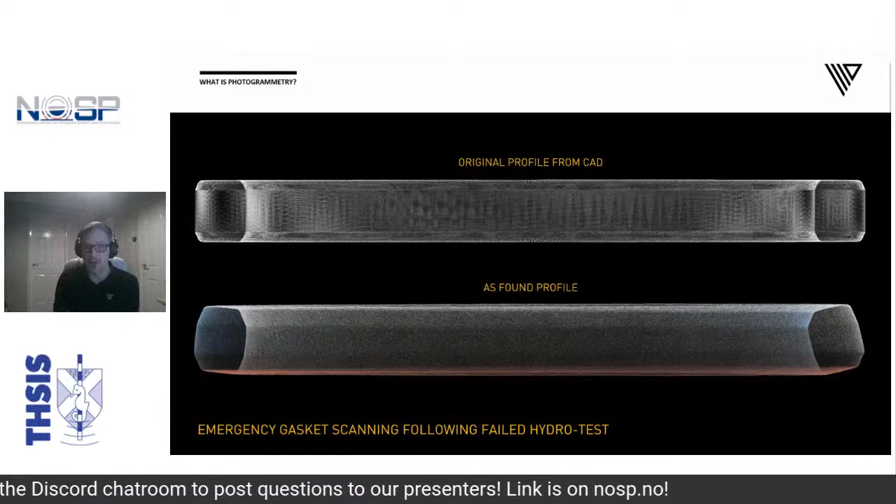Photogrammetry does not care about the size of something in the slightest. This would be one of our smaller scan targets, and subsea structures would tend to be among the larger pieces of hardware we've scanned, for technical reasons. So that is photogrammetry - it's very flexible. It works under a microscope, and it also works through a telescope. If we can bounce light off of an object, we can record it in 3D.

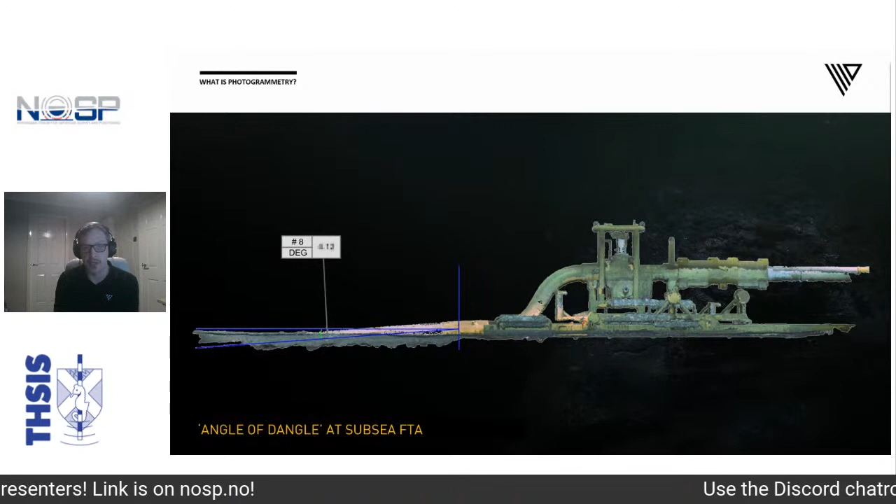On to some of our case studies now. I've tried to mix them up a bit in case any of the audience listened to our recent presentations, in an effort to keep things a little bit fresh. We're going to start off with 3 projects in some depth.

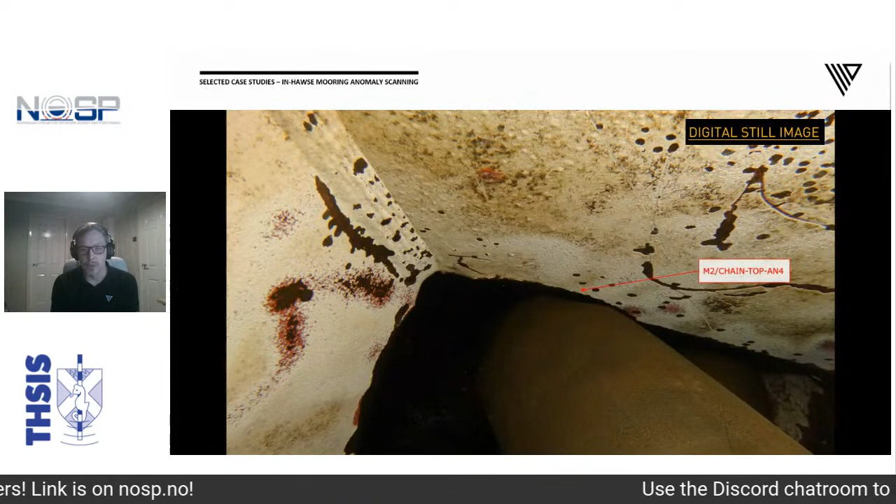In 2018, we were invited by a UK operator to discuss a challenge at the interface between hawse pipes and mooring lines. This digital photograph simply shows the challenges posed by the location of the anomalies - very hard up against the shoulder there. We were then told that 3 companies had tried and failed to collect measurement data, and that this effort was their last attempt before taking more drastic action. So, challenge accepted, our confidence prevailed, and we were awarded the project.

Again, another digital still image, purely as an example of the quality of data we need for tight tolerance tasks such as these. This is a downscaled version of a 20 megapixel photograph taken at a mooring link. As you can imagine, the original can be zoomed into for days, and this is the photographic quality that we really need under tight tolerances.

For the operational phase, we designed a system to enable capture of the mooring links and provide a full inspection report on the depths of the fretting, as well as the remaining bar stock. This was proved on shore in front of the client prior to mobilization. What you're seeing on the screen is a very small deviation analysis on one of the frets on that mooring line.

We devised a new reverse engineering workflow to alleviate the fact that some anomalies were obscured by the hawse shoulder, as you saw in the photographs. Some depths were as shallow as 1 millimeter, so cloud density and accuracy was absolutely critical during the project. More typically, anomalies were around 3 or 4 millimeters deep, having a significant effect on the expected life of the mooring lines.

We were glad to collaborate with the operator and the certifying authority during the reporting phase to make sure the way the data was reported on was fully understood by all parties. That was a very good exercise for us, helping us understand what the likes of Lloyd's and DNV are actually looking for.

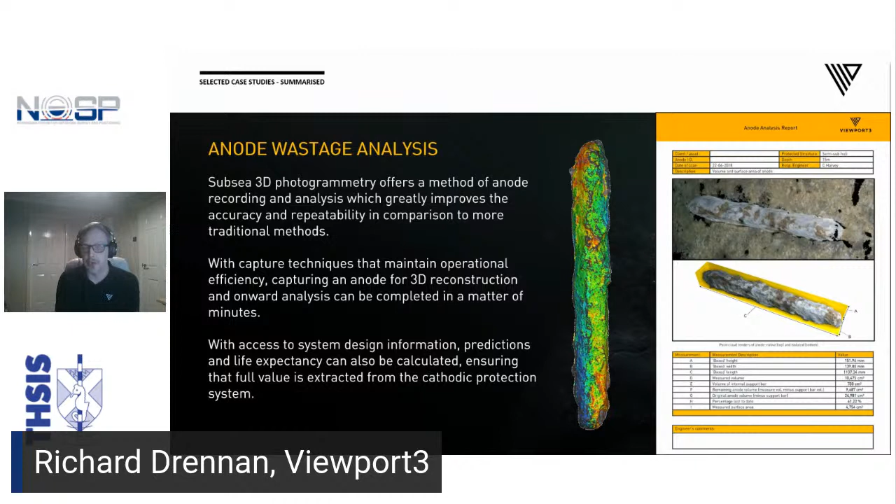With the rise in wind farm IRM requirements over the last few years, we've also simplified the process of scanning sacrificial anodes during annual inspections. These are now captured in a matter of minutes, with a comprehensive data sheet issued for each anode. This is of huge benefit when comparing the CP system design info to its actual performance, and for following years where required if some anodes are performing particularly badly.

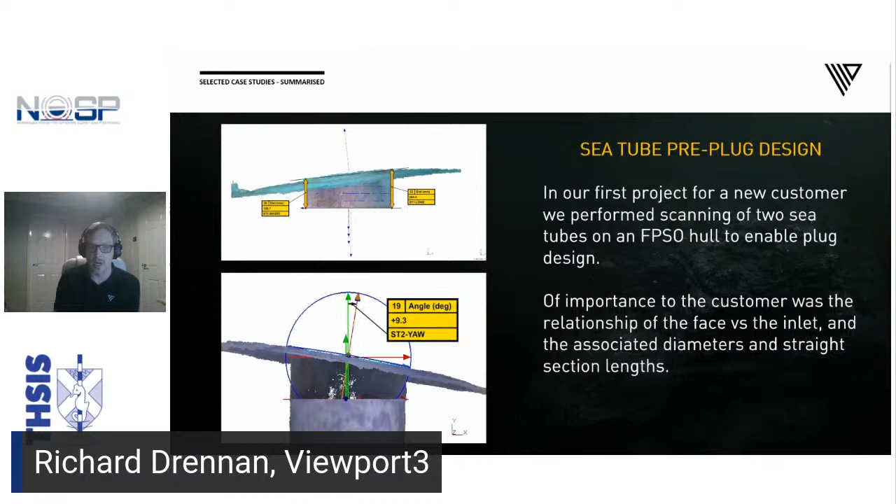Another mildly urgent job for a new customer of ours in the Norwegian sector last year. For this task we reported on the details of the sea tube distances, diameters, and angular relationship. This demonstrated that replacing missing CAD information is more efficient than trial and error methods. The pitch, roll, and yaw we were able to detail went a long way in helping them with that plug design, and they returned to us just a few weeks later.

This is the last of the case studies. Contrary to this image, that line should not be buried. We performed this 3D scanning task for an asset in offshore Angola, and we were able to detail the characteristics of the failure as well as the crack that had resulted at the FTA end. Quite a challenging task, but the ROV team were fully switched on and quite easily coached into collecting some very usable data.

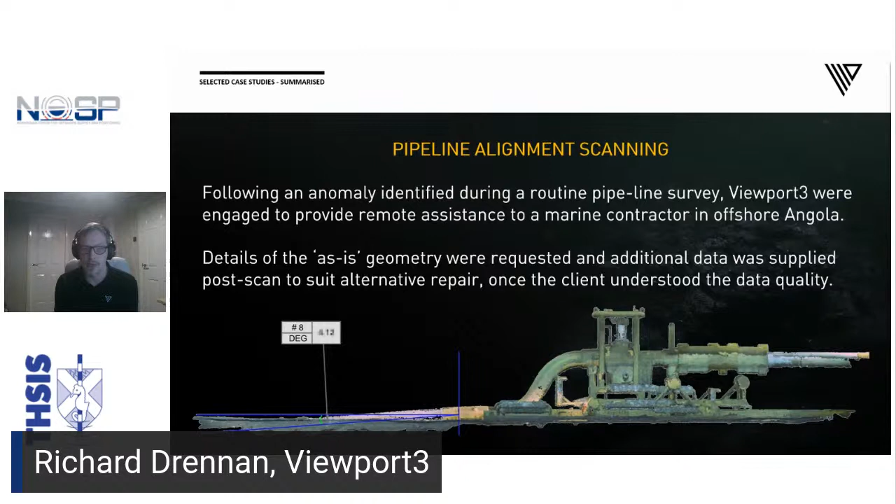Now that we have our 3D data sets in hand, we'd call that the halfway point. It's now time to use them and extract genuine value from what we've collected.

This is where CAI analysis and interrogation techniques come in, CAI standing for computer-aided inspection. It is critical that the software deployed is modern and suits the type of data you're trying to look at. It's also critical that the software does not introduce errors of its own making, which is something we've seen with some of the older packages.

I'd like to present, well, the title of the topic is a brief case of briefcase studies. We get into quite a lot of different fields out with the oil and gas industry. So what I'd like to do is present as broad a range of instances where we have applied photogrammetry, particularly using our own GP3D, which is our general purpose 3D subsea scanner. A lot of the work we've been doing recently has been concentrated on FPSO decommissioning, so I've really just modified one of our existing presentations.

So I'm going to start off with a quick overview of Savante Subsea, just to let people understand where we've come from and where we're going.

I started up Savante in 2003. I was 24, did it with £50 and set up a company. So I can certainly relate to the first presentation and a lot of the more business-related side of that presentation. We are now very much a specialist survey contractor, but also a developer of solutions. Our biggest market is still in the oil and gas sector, where we have developed, in addition to photogrammetry, subsea 3D laser scanning equipment, and additional optical technologies, which are themselves a variation on a theme of photogrammetry, using stereo cameras, SLAM mapping, which is simultaneous localization and mapping. And then more recently, over the last couple of years, we've been moving beyond 3D imaging and laser scanning to look at how we can evolve and make use of new technologies such as artificial intelligence, and also augmented environments for working in poor visibility areas.

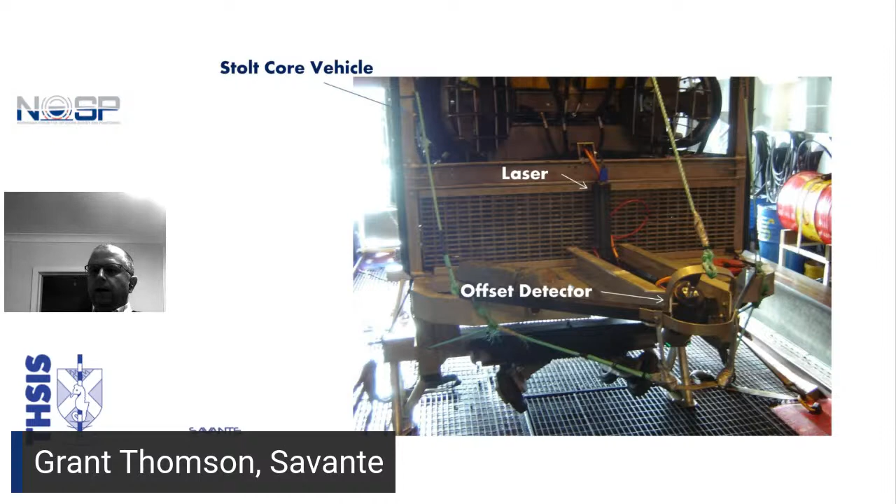I'll just move on to this one. This is actually, just in passing, one of the first subsea laser scanners that we actually worked with in Norway. So I'll move on from there and get back into photogrammetry.

The highlights of photogrammetry is that effectively we're creating a photorealistic digital twin engineering model. And the power of photogrammetry is that you create models which are exceptionally repeatable with high precision and accuracy. The value of that is it means you can go back to the same asset year after year and look to see the progression of degradation, whether it be through mechanical wear, sulfate reducing bacteria, that sort of thing.

Really it's just another tool in the box for us alongside the other optical techniques and also our laser tools. So I'll deal with photogrammetry as a single strand here, but what we have found with it is it is a very effective means of creating a 3D model underwater.

We still feel that subsea laser scanning, and we can show 3D data of the same objects collected by both techniques, the laser scanning still is the ultimate in being able to look at certain forms of damage. But the real value of photogrammetry is in the versatility and the flexibility of the equipment that you need to carry it out effectively.

3D-GP is our own software and hardware-based solution. I won't go too much into the details of it, but we have really centered on two main units. We've got the workhorse, which is this desktop-based system in largely orange, and that is really a very fast tool to run through all the calculations needed on a frame-by-frame basis from video footage in order to go and create a 3D model.

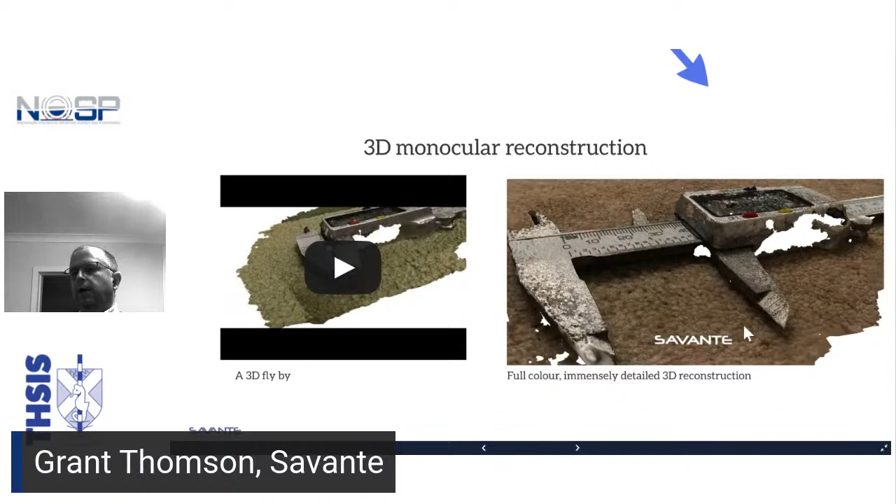Just a brief summary of what is photogrammetry. There is the old adage that a picture is worth 1,000 words, and with these pictures we pass them through our computer and detect features within each image. What we do from image to image is match the features between them and plot the relationship from frame to frame and within frame change. Then we have an algorithm which allows us to create a 3-dimensional reconstruction.

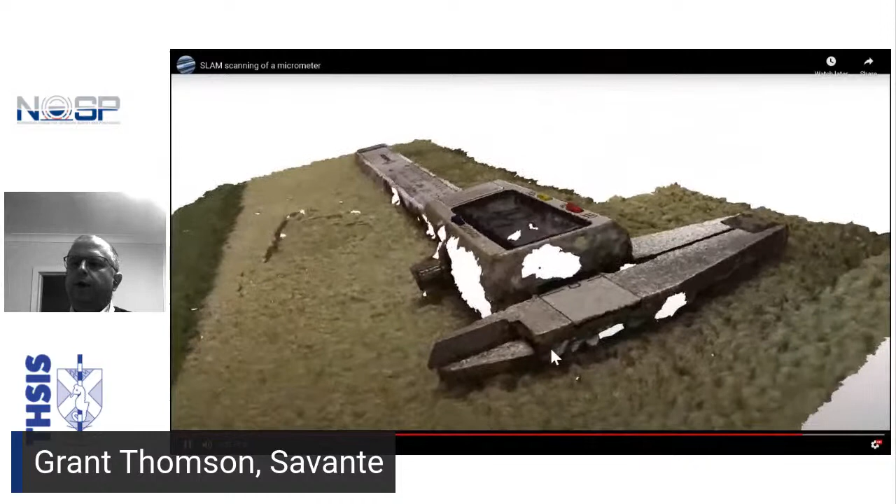I always present this as a micrometer because it's not a perfect world - there are some drawbacks to the technology. I like seeing the data in an unedited manner. In this example, you can pick up the tip of a caliper here, but there are areas showing in white, and these are experimental concerns you need to be aware of whenever undertaking a photogrammetry operation. In these particular areas, you've got signal dropout, and it's entirely due to insufficient light reaching the camera during those moments.

The benefit of monocular photogrammetry is that just about every ROV, towfish, or drop frame tends to have at least one video camera on it. So there is also a huge amount of heritage video data already within the industry, and we have many examples, even within this presentation, of heritage footage, whether standard definition or high definition.

An additional benefit of monocular work is that the performance and capabilities of photogrammetry improve as the cameras used to collect the data improve. So as we move towards faster, better camera architectures and larger arrays, we see an improvement in the quality of the 3D models we can generate.

Another benefit is that in addition to the 3D model itself, we can actually reconstruct the passage of the camera - a combination of both its position and its attitude at any moment in time during the collection process.

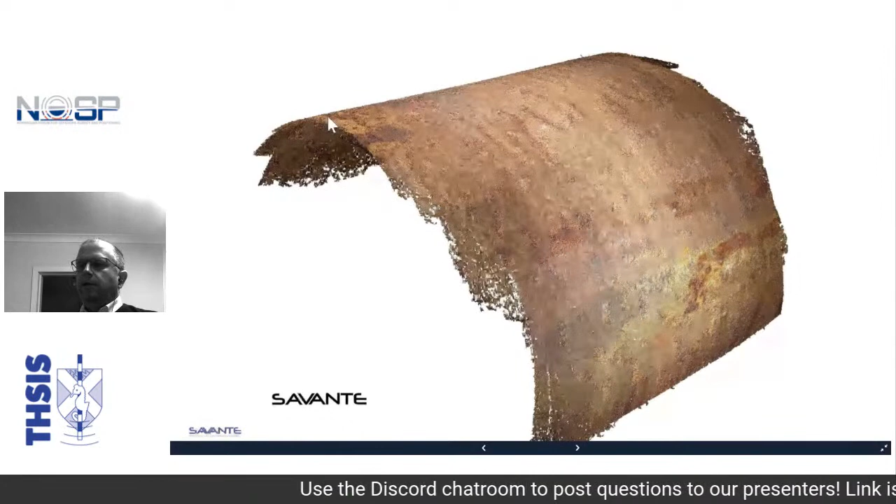So I've divided this up into sections, and I'll give a quick overview of some of the work we've done - an opportunity to show some of the data sets we've put together. Our first ever project was in the latter half of 2003, when we were asked to look at a pipeline anchor strike in the Gulf of Mexico. I haven't got that, but this is a partial scan over the top of a water injection line from the Gulf of Mexico at the time. It shows that the geometry here is very good, and also that we can pick up areas of corrosion and deformation.

That way, we have been doing a lot of work trying to extend the capability of GVI surveys, certainly not to minimize the requirement for them.

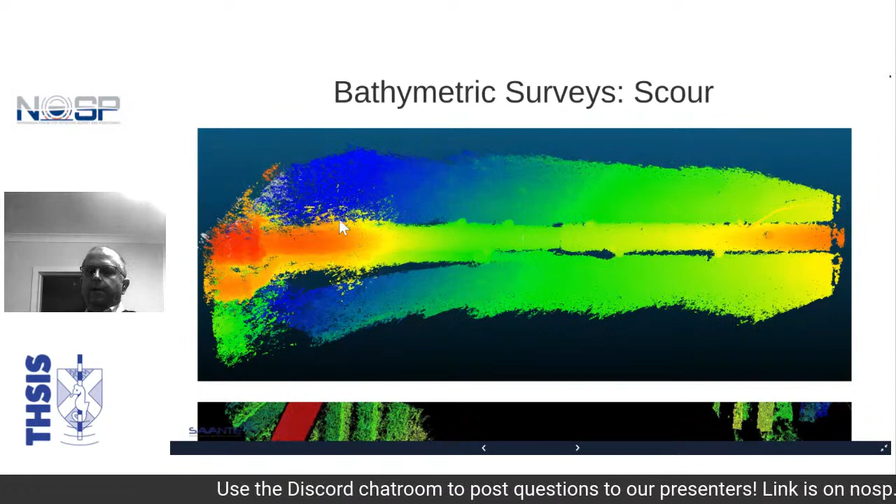This is an example of how we apply photographic footage from looking at spool pieces connected to wellheads. We've created a 3D model of a spool piece coming out from a concrete mattress, plotting the topography of the adjacent seabed, with areas in blue indicating greater depth. You can see elements of marine growth on top of the spool piece, and the point of connection.

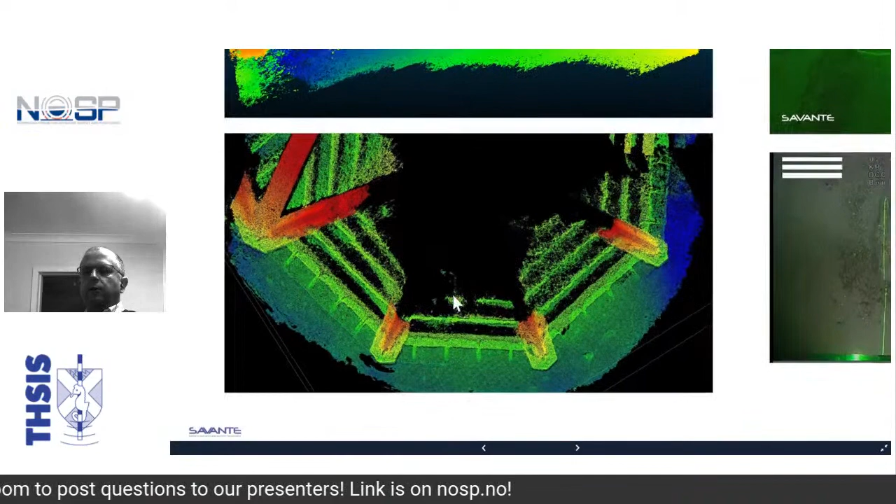Whether looking at pipeline areas or scour development around mud mats, this is another example created using legacy standard definition video footage. Again, it's able to resolve the presence of little stones in the seabed around the mud mat, and you can see areas of scour developing on the side. It's really adding value to what you can achieve using the most basic of video cameras.

This is a 360-degree walk around of that spool piece I showed you earlier, not colored to show depth. Again, this illustrates you can really see exactly what was down on the seabed. This is a 3D CAD model, so you can process the data afterwards and make all sorts of measurements.

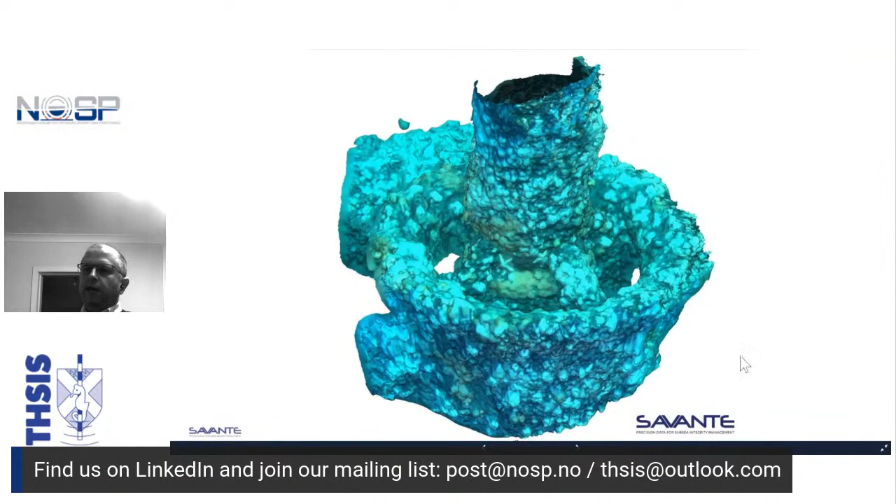In terms of projects we've been asked to look at, this is an example where a client asked us to validate the dimensions of stubs used to hold conductor guides. This is the kind of environment we're used to working with, heavy marine growth. We were supplied with HD footage - to us, HD would be 1K, 2K video, while our own cameras are up at 20 megapixel and 85 megapixels. So a lot of the data we're showing here, especially legacy footage, is nowhere near the true capabilities of the technology. But here's a 3D rendering of that same conductor going through the guide funnel.

Once we had a nice point cloud, we were able to rotate the model through 90 degrees, effectively peering through the conductor from the top. We saw a very nice, clean external surface. When we looked through the video, we realized the conductor is stroking up and down through the guide, perhaps due to heat expansion and contraction, we're not sure, but also rotation. This gave us a very nice external surface to use as a datum.

I'll talk about that after I've gone through some case studies, but one of the problems with monocular photogrammetry is that it doesn't inherently give you the capacity to make distance measurements. It's very good for geometrical measurements, but it's not actually a true digital twin in the sense of being able to go in and do full 3D measurements. To do that, you need some sort of indication of scale.

As in this instance, we were able to curve fit the internal surface of what was effectively a cylinder, and we went back to the client to confirm what that dimension should be. In essence, what we ended up doing was scaling the model to convert it from a dimensionless 3D point cloud to an actual dimensioned, measurable digital twin.

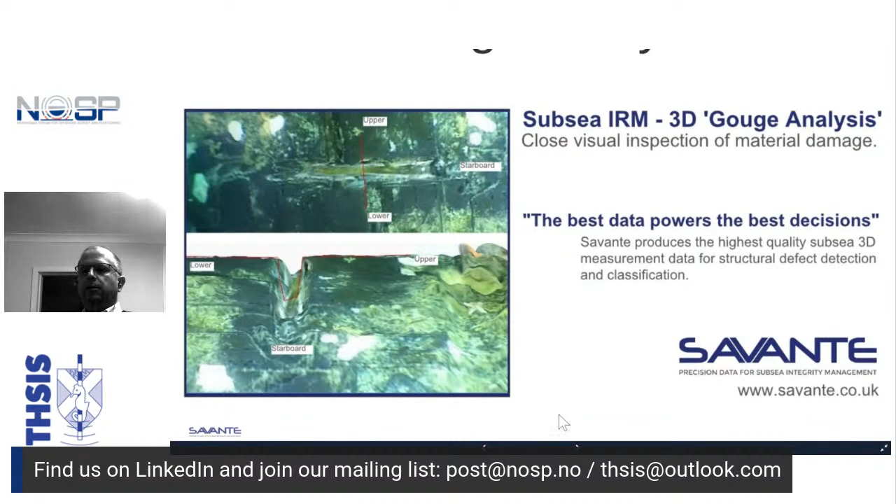A lot of the applications we get involved in at the moment look at components that have been damaged, dropping off. This is an example of a conductor that has been supported in location as part of a repair. We've also seen the same methodology applied to the bottom. This allows us to capture the site at a moment in time in order to plan for more effective repairs.

And again, it's not just the capacity to look at small areas. This is a 3D model of a conductor, where we've taken frames from video footage along the complete length, picking up the marine growth, but also the geometry of the conductor, looking at areas of deformation, really just to identify if there's any additional remediation work needed.

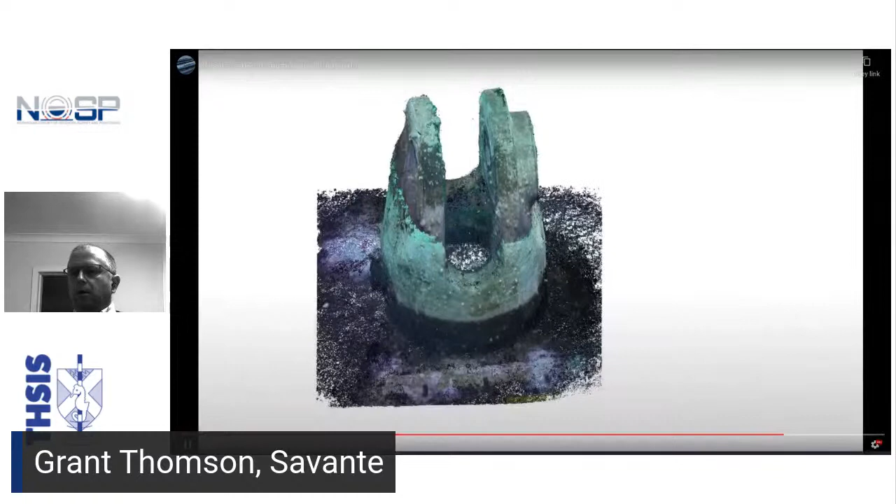Also looking at pipelines which have been severed from platforms. This is an example where a diamond wire saw was used to sever the end of a pipe, I think a 3-inch methanol injection line. We've looked at larger areas too, using video footage of opportunity to create models like this and provide records for submissions to regulators.

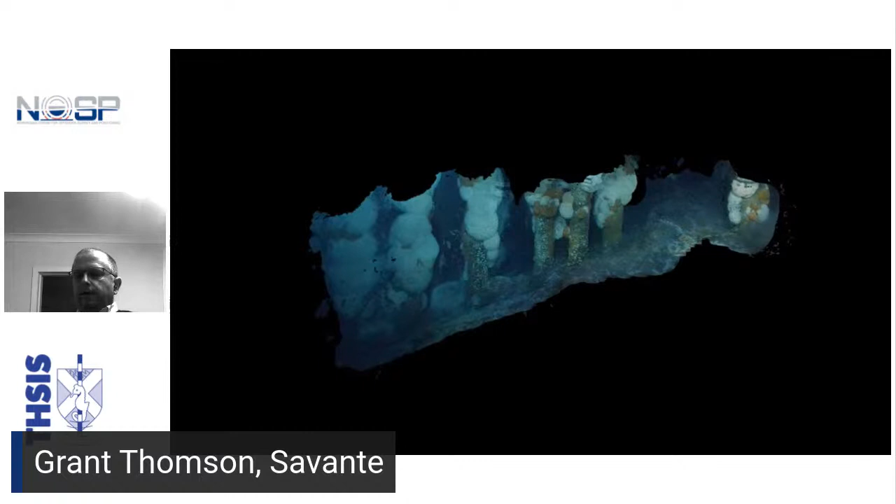Again, areas important to regulators when decommissioning structures. This is some video footage converted into a 3D model where we looked at determinations of drill cuttings deposited on the top of the platforms. In addition, you can see some really nice examples of cold water corals as well.

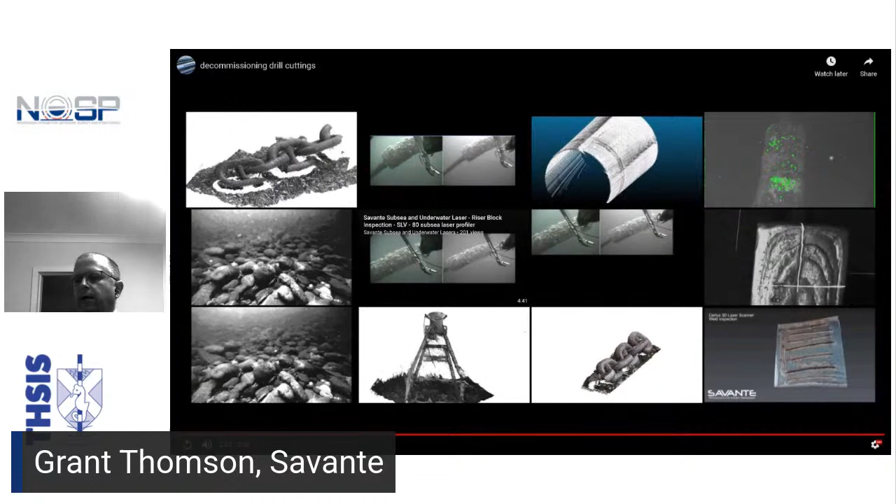For this particular application, measuring drill cuttings is fine, but there are also environmental applications for people concerned with understanding the impact of subsea infrastructure on the growth of subsea species. We do look at environmental science as well, which takes us away from the oil and gas arena.

This is an example of a very large complex siphonophore, a filamentous marine organism. Again, we can take video footage and create nice measurable 3D models of it, capturing all the contorted structures there. In some of the videos we do see some noise creeping in, but by and large, it's pretty good.

FPSOs are a subject of interest to us at the moment, whether it be looking at the mooring systems and components to which mooring chains are docked onto and connected up to. So we see cheek plates here, and then also components of the fairlead assemblies.

I'll just skip through some of these. It's nicer to look at it as full motion video, but it's not just the capacity to look at marine growth. Within this video footage, you can pick up areas of surface damage and wear on the sides in particular, and give an immediate determination of the depth of wear.

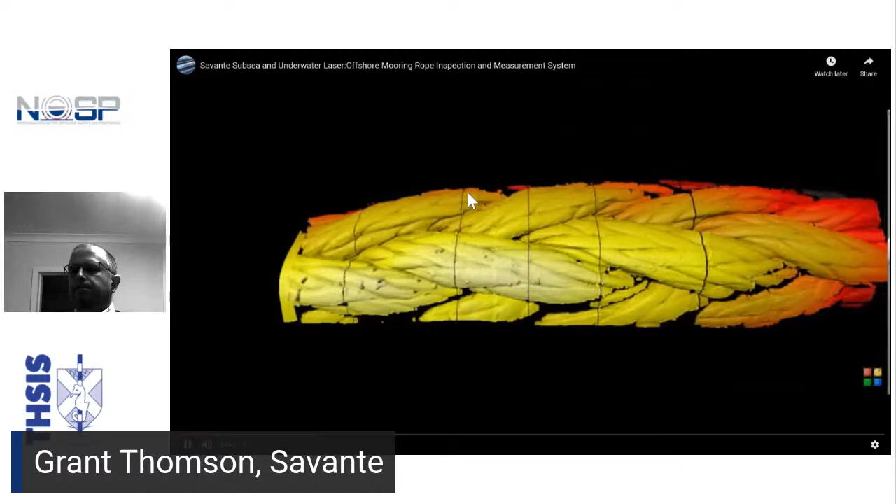Jackets themselves, this one is a video from - really just a 3D model that we've made of anodes, and a little bit of a walk around, just showing the presence of marine growth on it.

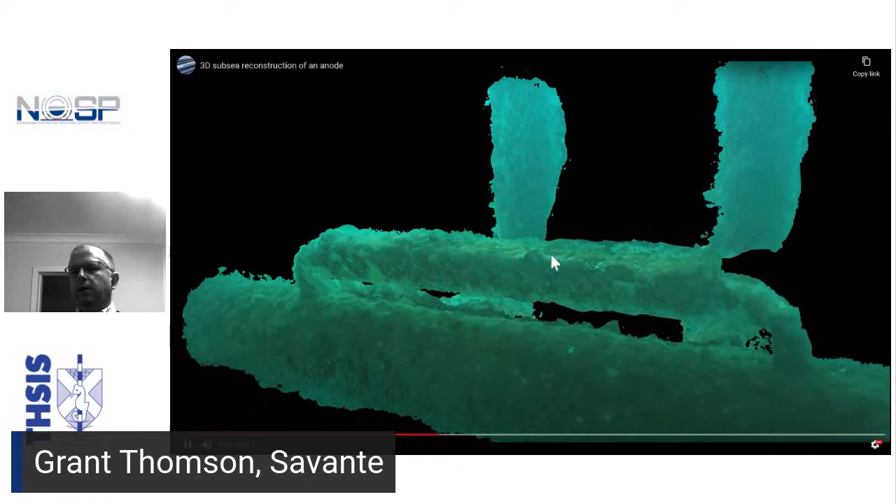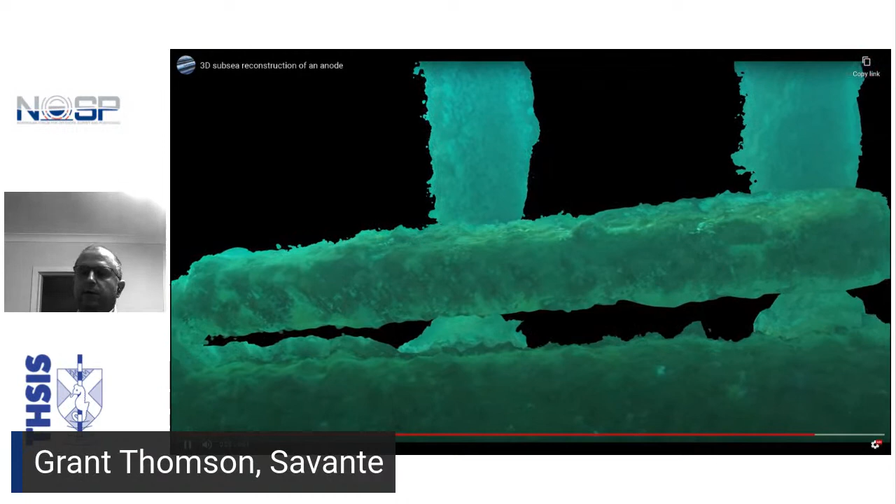But again, we can do a cuboidal fit to this area of a point cloud to provide a determination of the dimensions and volume left. And ultimately, it takes out a lot of the subjectivity associated with the alternatives, which is to give an estimate of depletion on, currently I think it's, 25% bins.

Within jackets themselves, we look at areas of members, with plenty of examples of these, whether it be single conductors and their attachments. We've also looked at much larger examples here as well. Just a final image from that data set.

But then also looking at structures such as subsea pile sleeves. This is footage - a 3D model that was created using standard definition video footage. It's good enough to give you the capacity to do some fitting of primitive objects, so cubes, tubulars, spheres, with some great definition on the anodes on the structure as well, and the points of attachment, all the way from the top of the pile down to the seabed.

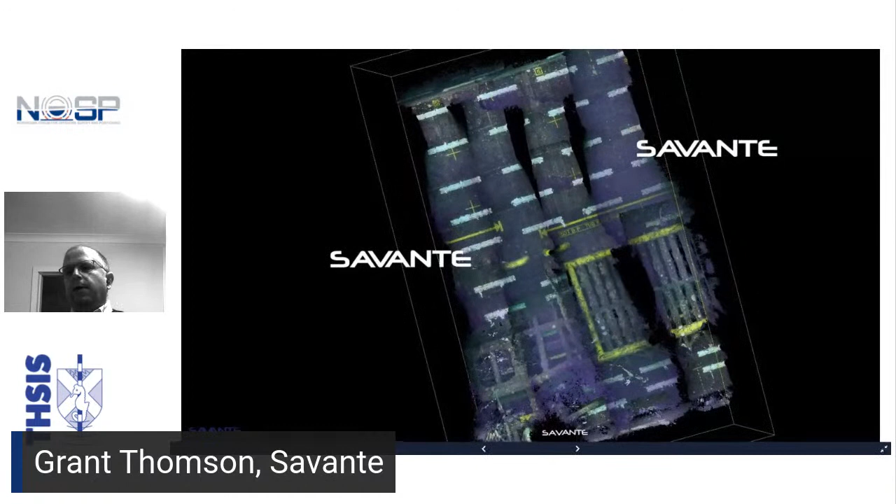Some interesting aspects of the use of photogrammetry. This is the side of a storage facility, but what we can do with video footage is show the general path of the ROV as it travels from seabed to the top of the structure, raster scanning effectively along the length of it. One of the values of photogrammetry, especially if you're able to perform it live, is that it shows up areas where the ROV actually hasn't visited.

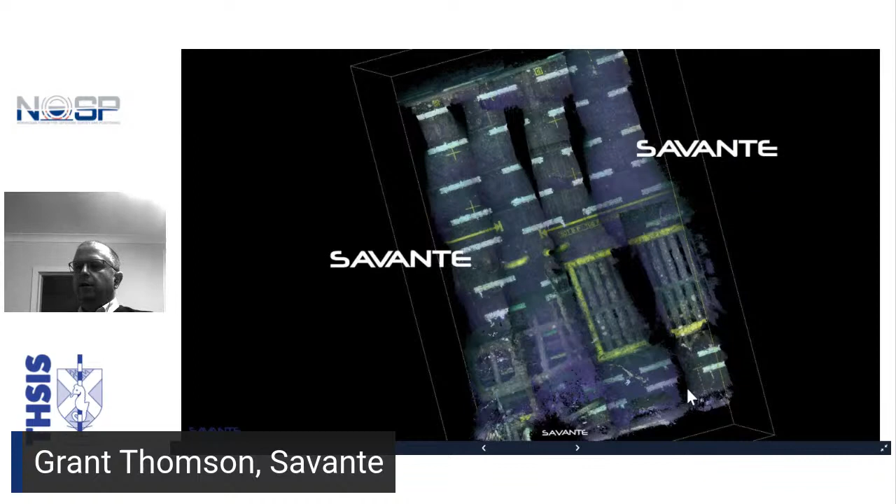These areas in black represent areas where there is no video data, giving the client an understanding of what's going on. If you're looking at areas like this where it's largely just structural plates and maybe the side of an anode, that may not necessarily have significant consequences, but certainly when you're looking at structures within here, it's important to recognize that this data hasn't been collected, and address that in field.

The examples I've shown you before are really what we would reference as being simplex models. This is an example where you have a single video file from a single video camera, and you run it through the system and create a nice 3D model. The trouble is that doesn't really integrate very effectively with a modern GVI campaign.

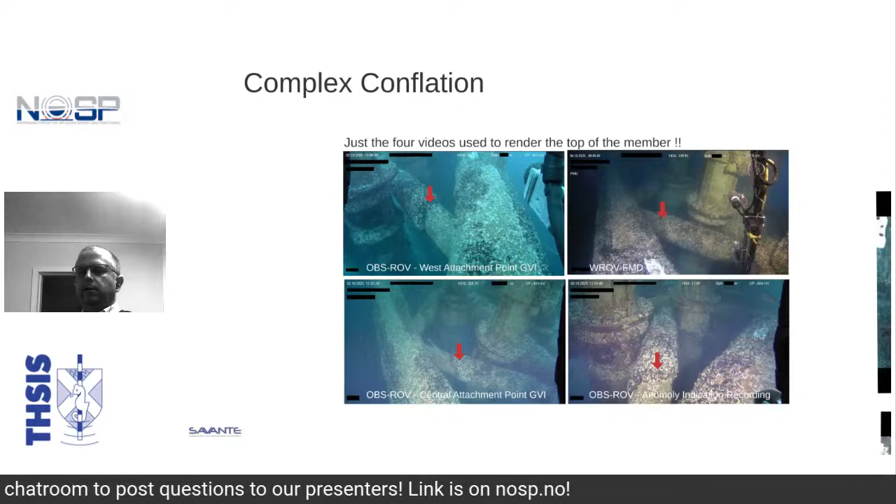To illustrate, I'm going to show you a selection of 4 images that we had to interpret from 4 separate video files collected at 3 different times in the day using an observation ROV. The first video file focused on the western attachment point of this member to this member. The second looked at the central attachment point. The third collected a video clip of an anomaly that had been identified. The fourth required video footage from a work class ROV, so it wasn't even the same ROV collecting this data. This is an example of a more complex situation where we've had to develop the software and process to identify the same features within different video clips that weren't even recorded using the same system.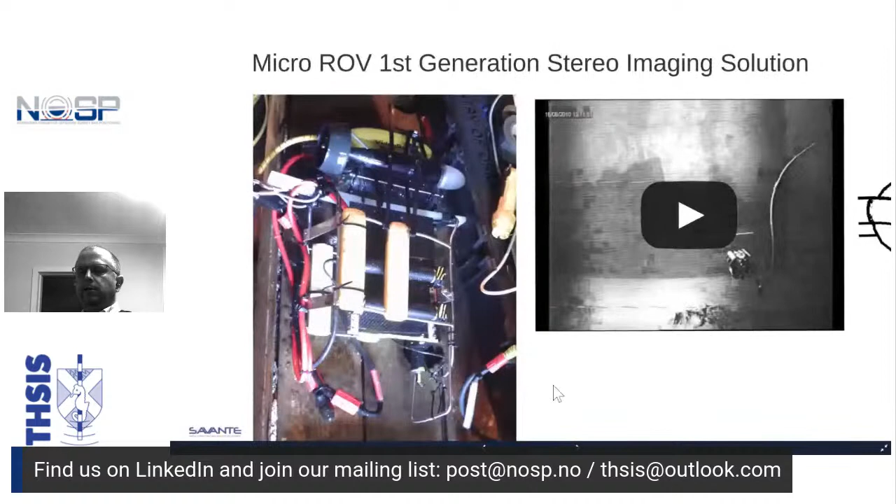Where we are at the moment is using multiple cameras, all synchronized with each other. The benefit of stereo photogrammetry is really in the mathematics needed to support a 3D reconstruction - it's pretty much simple trigonometry by comparison with monocular-based work. The value of stereo photogrammetry is that you can perform real-time 3D visualizations. So if the scene is dynamic in front of your camera, you can actually measure the extent of movement. This is very valuable if you're looking at objects that have fallen loose and you're wanting to categorize the extent of motion.

With stereo photogrammetry, we can also deploy real-time SLAM, and this is the capacity to make 3D models of the object, but also track the position of the ROV as it's making those measurements.

Another advantage, and this is again a solution to the scalability problem of monocular work, is through the calibration of a stereo camera—you no longer need to install scale bars on the objects you're measuring. And what we found in moving to stereo work is we've been able to collect measurements with lower residuals, so it's a more accurate measurement.

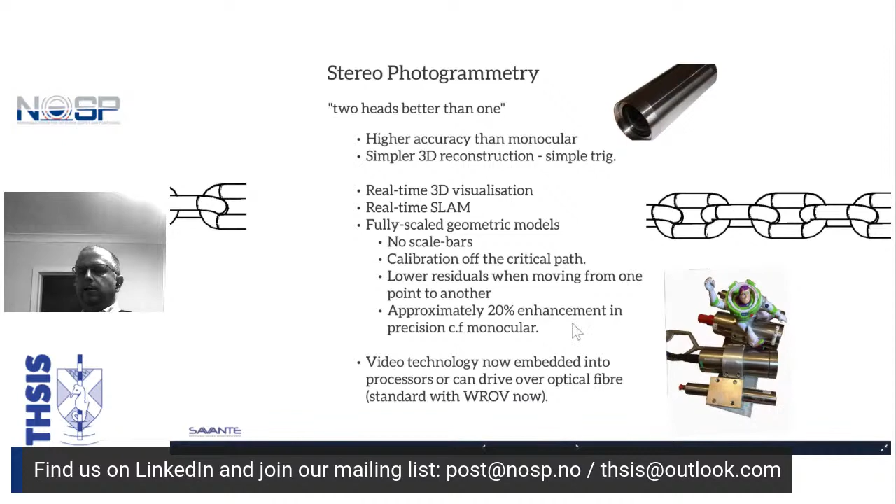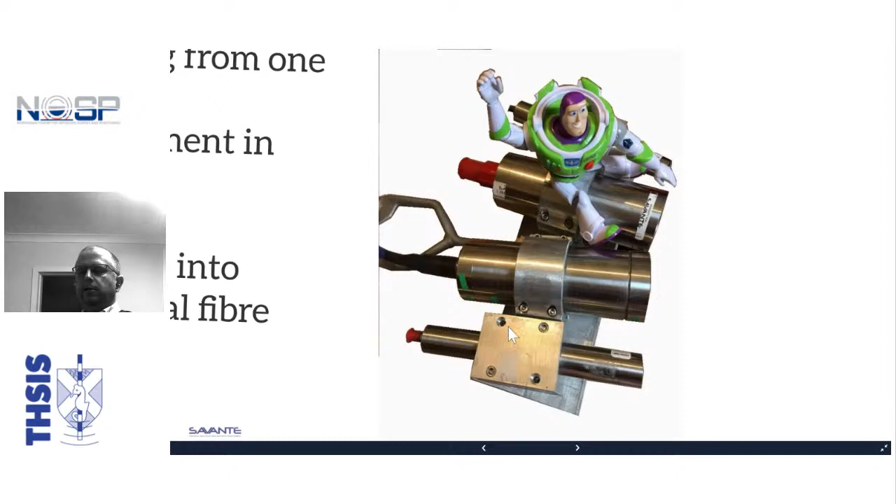We have put together a variety of tools that we've deployed in the field, some of them using really nothing more significant than taking 2, 3, or 4 of our vector cameras and mounting them rigidly on a section of U-bend. This is an example of one we put together for mounting in an ROV manipulator claw, and it works pretty well.

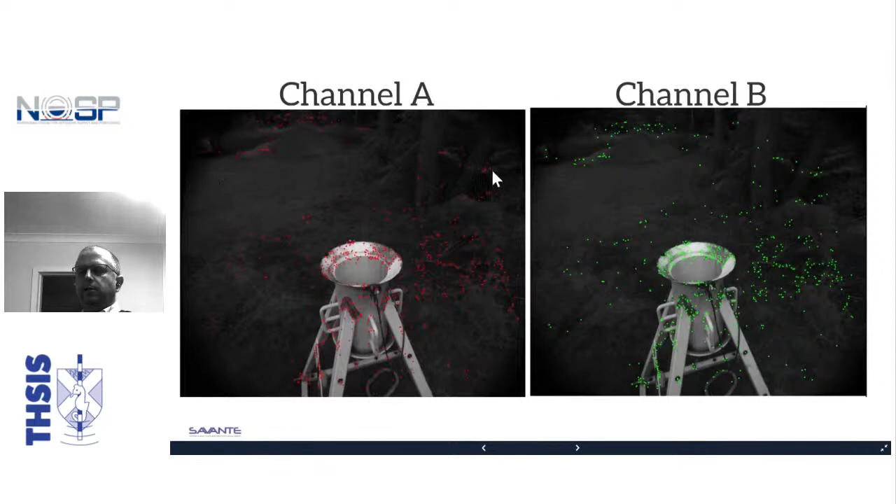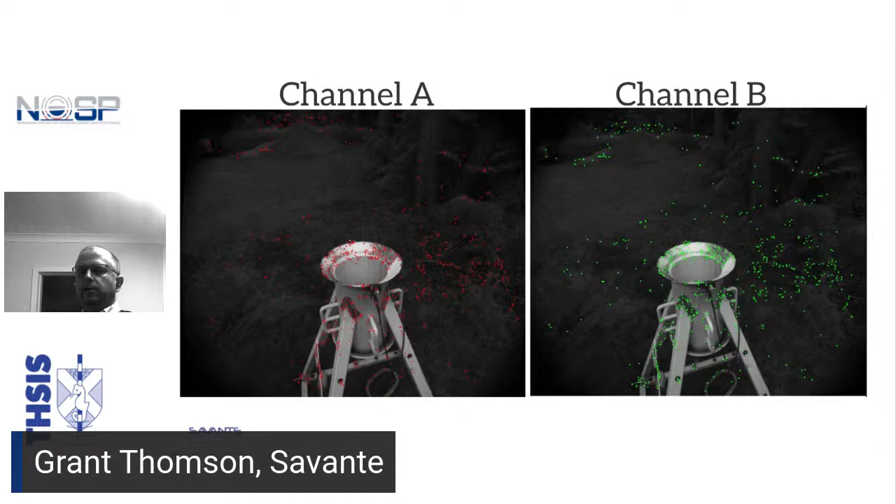This next slide is really an illustration of the basic premise of stereo photogrammetry, which is that you have 2 video channels, they're synchronized, and you look at an object through both channels simultaneously. On the left-hand side here, you see dots color-coded in red. On the right-hand side, you see the same features. These are numerically important features. The computer determines these and then looks toward matching the features in front of the camera. And it means that you can create a point cloud that way instead of having to run through lots and lots of video footage.

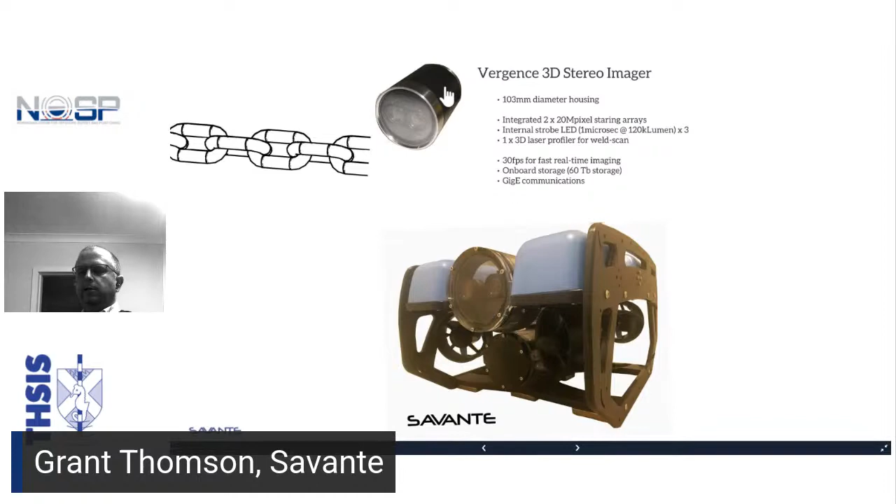And other forms of stereo imaging that we've developed—up on the top, we've got our Vergence 3D scanner. What we've done within here is integrated 2 very high-definition video cameras, and also basic laser scanning capacity as well, plus some onboard storage and some processing equipment.

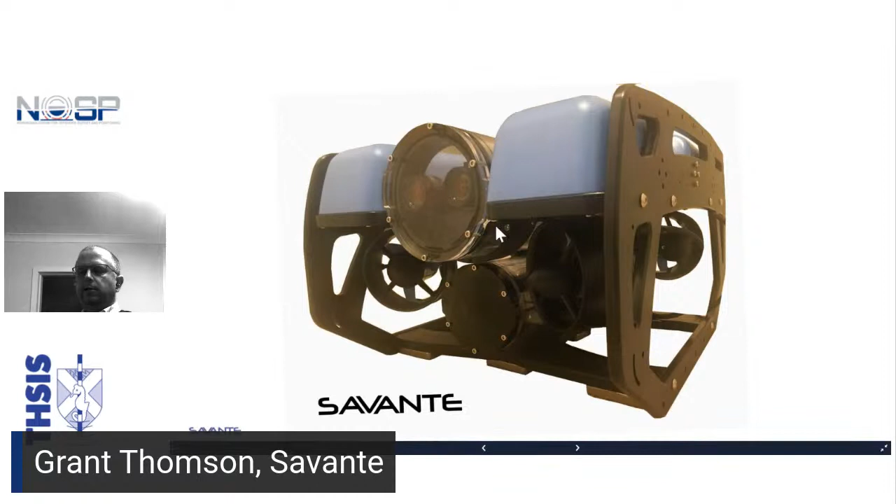And where we are at the moment is really deploying the same sort of Vergence technology, the stereo camera arrangement, but we've integrated this into one of our micro ROVs and taking this to the oil and gas industry ourselves to perform measurements when required. And this is giving us greater flexibility than being reliant upon legacy data.